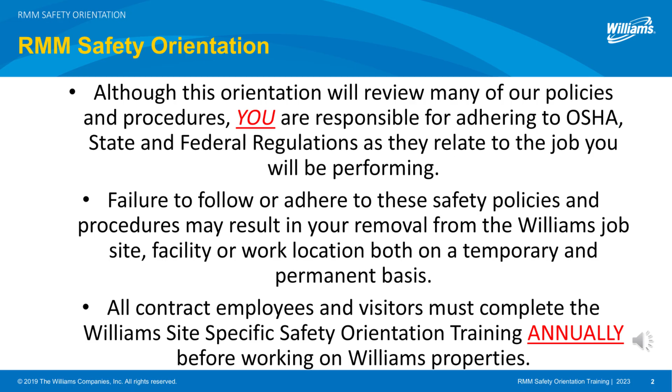All contract employees and visitors must complete this site-specific safety orientation training annually and pass the test before being allowed to work on the property. Upon successful completion, you will receive a completion sticker.

At Williams, one of our core values as an industry leader is to be safety-driven. We believe all accidents, injuries, and incidents are preventable. Williams authorizes all employees and contractors on site to stop work. Stop work authority means we expect all personnel to operate in a safe and controlled manner while operating within design and environmental limits.

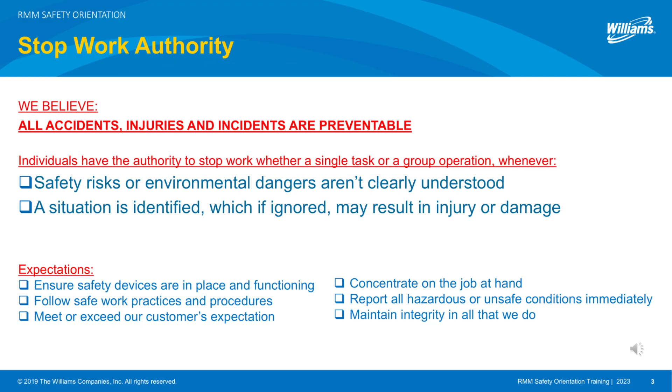Be aware that company facilities handle natural gas, methane. Explosive, flammable, combustible, or toxic environments may be present. Although this orientation is not comprehensive, it highlights some of the minimum safety requirements that apply to contractors and visitors. The safety orientation is not to be used by itself. It is to be used in conjunction with the Williams Contractor Safety Handbook.

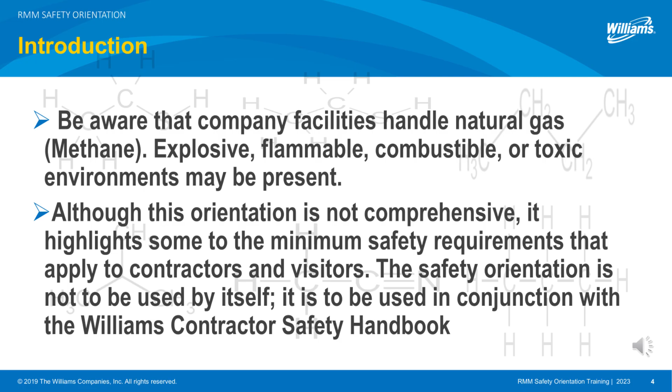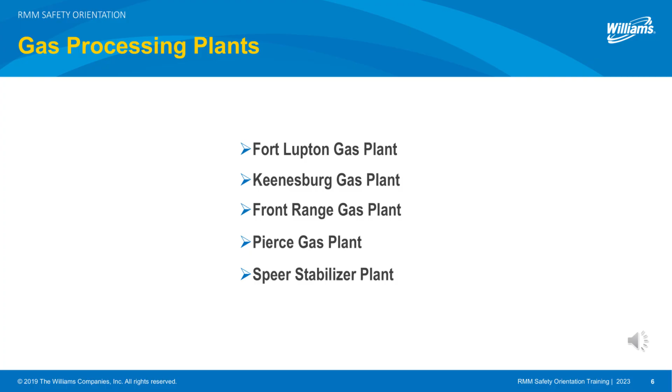Facilities and assets covered in this safety orientation for Rocky Mountain Midstream includes a gas gathering system which includes 11 active compressor stations and numerous pig launchers and receivers. Additional Williams Rocky Mountain Midstream facilities and assets covered in this safety orientation are 4 gas processing plants and an oil gathering system that has LACT units.

The following facility layout includes the safe driving path and emergency muster area for the Mustang compressor station. Please consult with your Williams representative regarding the safe driving path and muster areas for the compressor station you will be working at. The primary muster area is generally at the main entrance, and the perimeter 35 feet away from process and piping is the safe driving path. All contractor-operated vehicles shall follow these driving paths and sign in the control room.

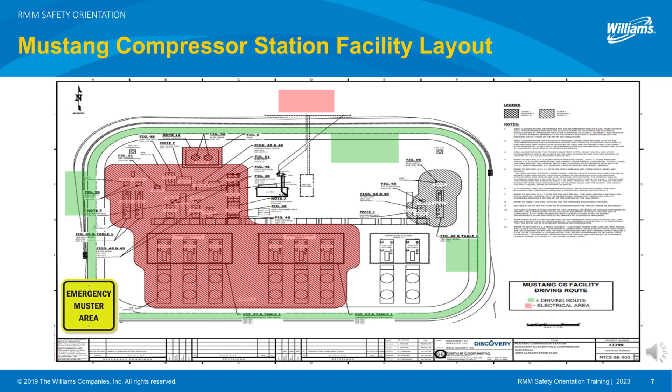This is the layout of the safe driving path for the Speer Stabilizer plant. The primary muster area is at the main gate. All drivers loading condensate will need to sign in at the control room, have a Williams representative issue a hot work permit, and properly ground bond their vehicle before loading activities begin. Williams considers the Speer Stabilizer plant to be a DOT facility.

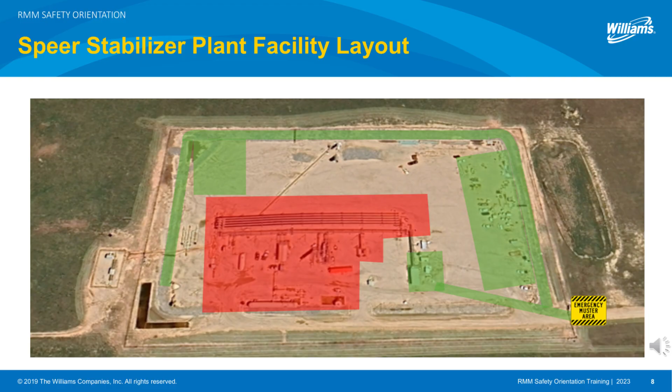The areas in green are the safe driving path for the Keenesburg gas plant. The primary muster point at the Keenesburg gas processing plant is at the control room. The secondary muster point is at the main gate.

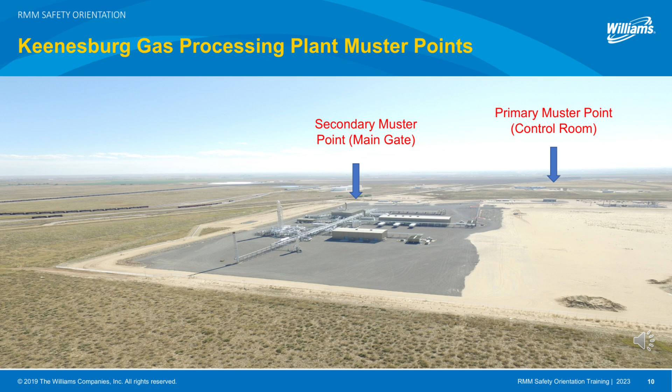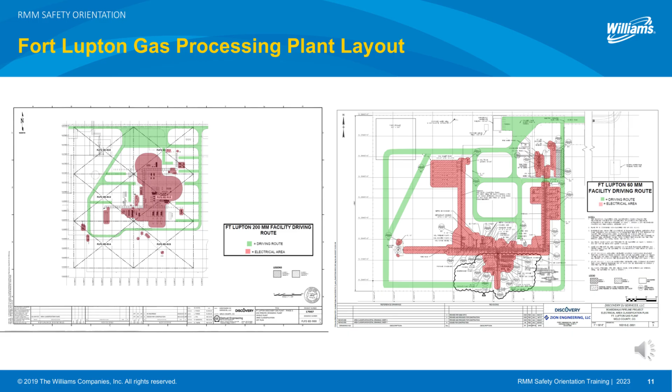The following areas in green are the safe driving path for the Williams Fort Lupton gas processing plant. Fort Lupton gas plant has a 60 million plant to the west and a 200 million plant to the east. The primary muster point at Fort Lupton gas processing plant is at the main gate. The secondary muster point is at the control room.

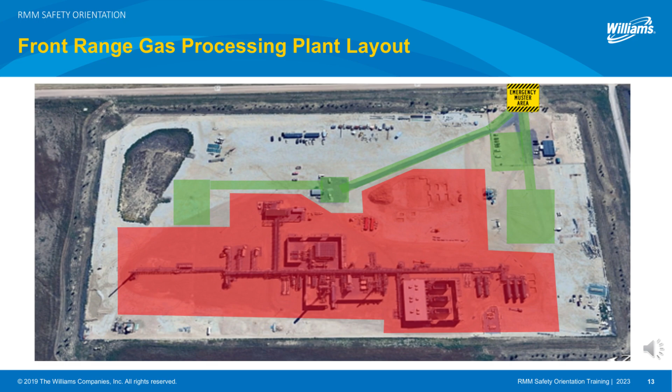This is the layout of the Front Range gas plant. The roadways travel through the plant and around the perimeter of the plant. Please remember to keep vehicles at least 35 feet away from process.

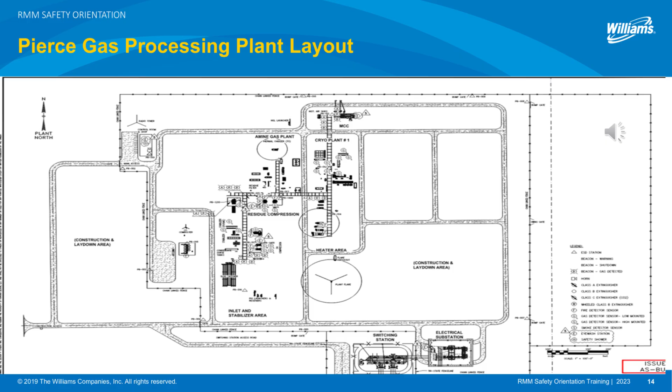The primary muster point for the Pierce gas processing plant is at the main gate. The secondary muster point is located directly west of the main gate by the curve in the road.

There is generally not a consistent design or layout for producer's pads, facilities, and pigging sites. The muster point is typically at the entrance of the location. Please consult with a Williams representative as to where the primary muster point is located.

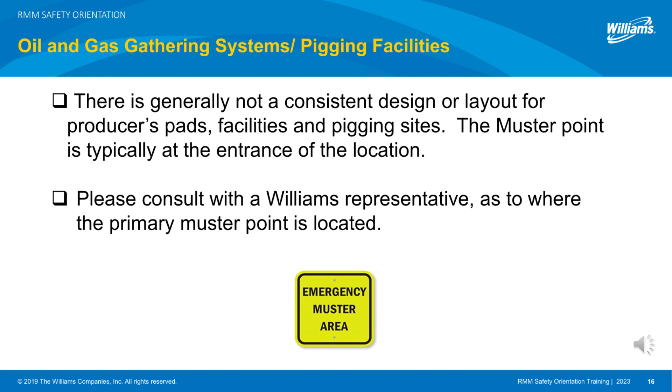Rocky Mountain Midstream has an emergency alarm system that consists of some visual alarms, audible alarms, or both. The alarm is activated in the event of an emergency in the immediate area or site location, severe weather, or other facility emergencies that require evacuation. Please consult with a Williams representative to determine what type of alarm system is at the area you will be working at. If you hear or see these alarms, stop work and evacuate the facility upwind, uphill, and upgrade.

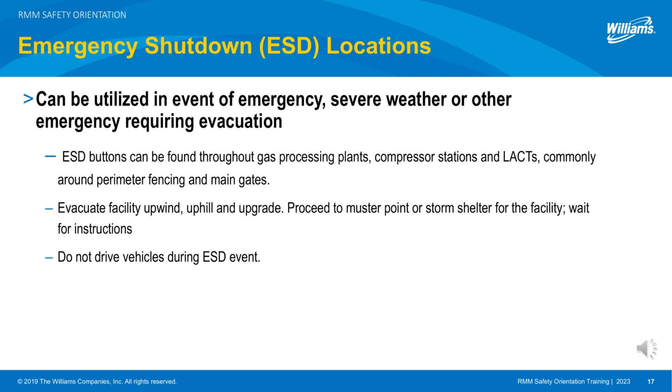It's important to always pay attention to the wind direction. Proceed to a muster point identified at each facility and wait for further instructions. Smoking, e-cigarettes, and vape pens are prohibited at Williams facilities except in designated areas. Ask a Williams representative where the designated smoking area is located, if needed.

By working at a Williams facility, vehicles may be searched for contraband. All accidents, incidents, use of stop work, and near misses must be reported to a Williams representative as soon as possible. The use of cell phones, cameras, and other non-intrinsically safe devices is prohibited at Williams facilities within 35 feet of process equipment, unless a hot work permit is in place.

Contractors must adhere and follow all posted warning signs and vehicle traffic patterns. Speed limits are 15 miles per hour.

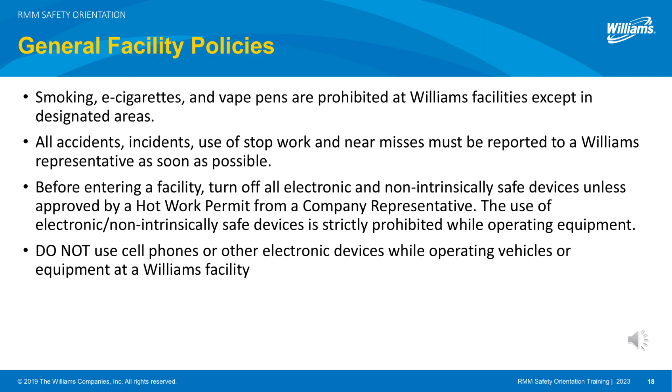All contractors and visitors must check in at the control room and with a Williams representative prior to starting work. All contract employees and visitors must sign in and out of the facility for accountability purposes.

It is the contractor's responsibility to ensure that all contractors have a clear understanding of this safety orientation, as well as have the ability to communicate effectively with Williams operations at all times.

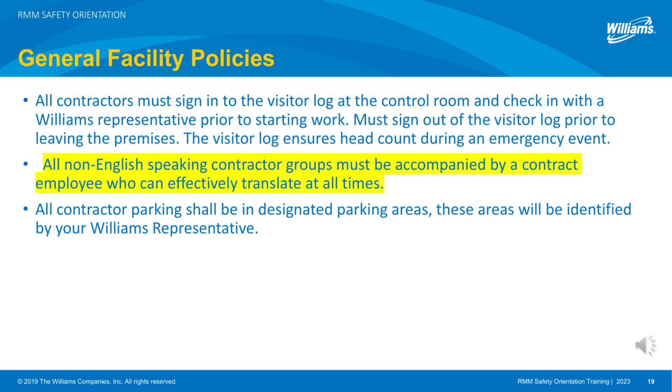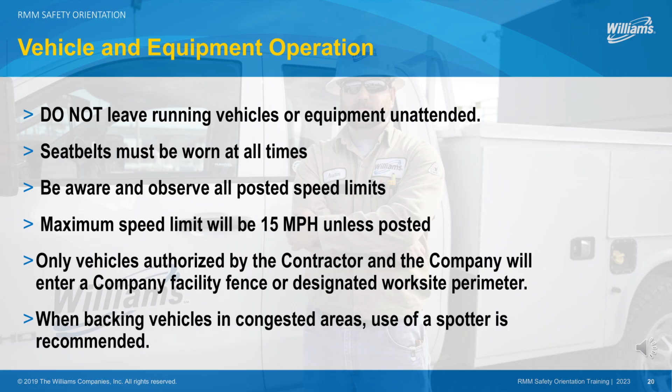All contractor-operated vehicles shall be parked in designated areas. Here are some rules about vehicle operation: seatbelts must be worn at all times, never leave running vehicles or equipment unattended, and be aware and observe all posted speed limits. Maximum speed limit will be 15 miles per hour unless posted.

Contractors must not operate any Williams equipment without direction or direct supervision by Williams personnel. It's critical that you remain aware of your surroundings when operating any vehicle or equipment. Conduct a walk-around check for hazards before movement. When conditions warrant, use a spotter and make sure that any equipment and items loaded on them are properly secured.

Remove any damaged or defective equipment from service immediately. Inspect all equipment brought to the facility prior to use. Use ladders with non-conductive side rails and visually inspect all ladders prior to and after use. All ladders must meet OSHA 1910.23 E requirements.

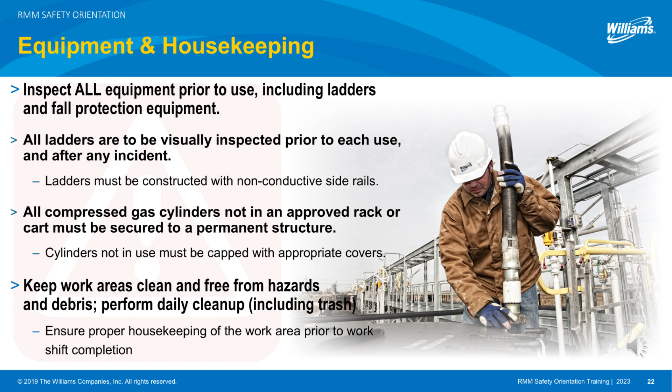Keep work areas clean and free from hazards and debris by performing a daily cleanup of all work areas, including trash. Williams' lightning policy requires contractors to stop work and cab up if lightning is 10 miles or closer.

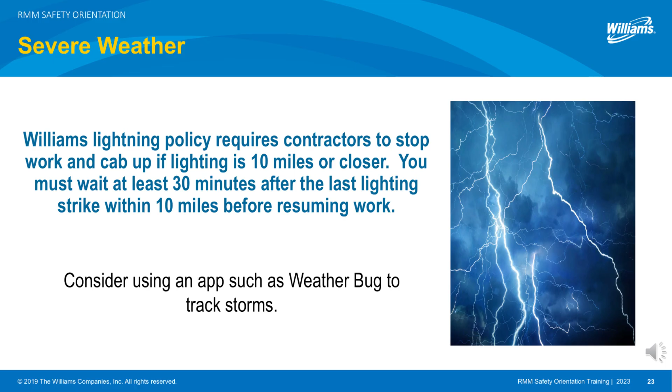You must wait at least 30 minutes after the last lightning strike within 10 miles to resume work. Consider using an app such as WeatherBug to track storms.

Smoking within Williams property is strictly prohibited. Do not bring lighters, matches, and e-cigarettes to any of our facilities. To find out where the smoking locations are, ask your Williams representative.

Firearms, drugs, and alcohol are strictly prohibited at Williams facilities. Vehicles may be searched at any time without warning while on Williams locations.

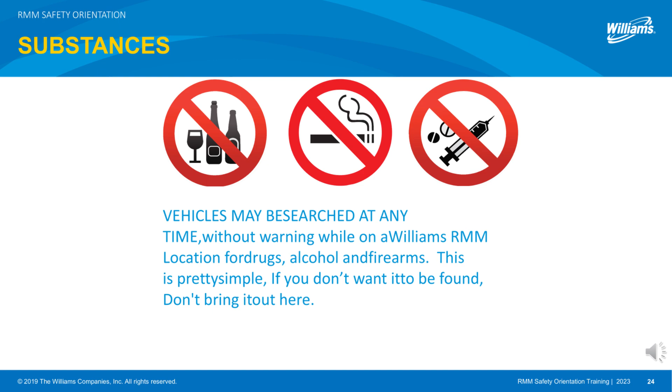Contractors and employees exposed to work-related fall hazards must use guardrails, control lines, or a personal fall arrest system. When working at heights 4 feet above grade or more, use a fall protection system or harness. Always use the appropriate tie-off anchor point.

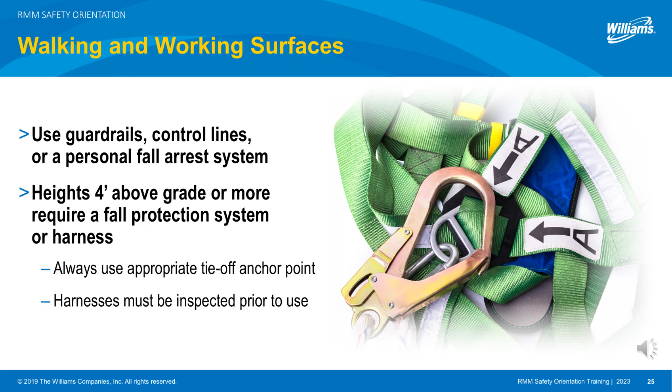Harnesses must be inspected prior to use. When working off a ladder, consider using fall protection and proper anchor point.

Contractors must provide their employees with the required safety equipment as identified in the Williams PPE policies and procedures. At a minimum, this includes flame-resistant, FR, long-sleeve shirt that covers all exposed skin, full-length FR pants, hard hats, safety glasses, safety-toed boots, personal 4-gas monitor, gloves appropriate for task, high-visibility FR vests while working around heavy equipment, and hearing protection as identified by signs in the facilities.

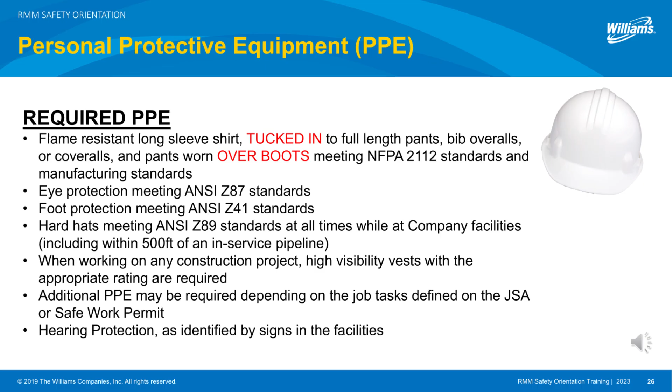If you have any specific questions regarding PPE at your worksite, contact your Williams representative.

All accidents, injuries, near misses, spills, or releases must be immediately reported to the facility supervisor, lead operator, project manager, or COM, and to the safety representative.

Do not bring chemicals to a Williams facility without prior approval from a Williams representative. Contractors bringing chemicals on site will be asked to provide a safety data sheet.

When operating a crane or other heavy equipment, remain at the controls while the load is suspended. Use 3 points of contact when entering or exiting equipment. Make sure loads are tethered and secured. Never walk under a suspended load.

All operators will remove their high-visibility vests during equipment operation to avoid unwanted mechanical movement.

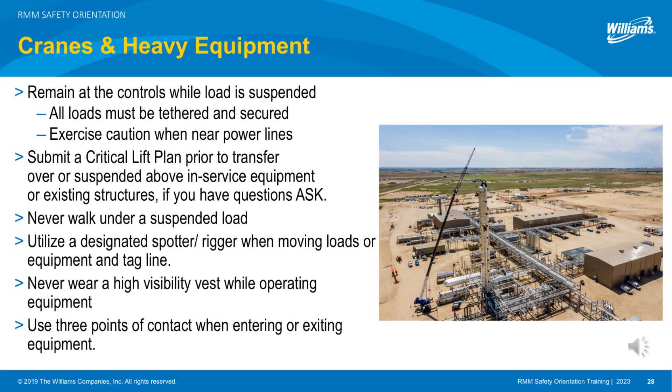Many of our locations have buried and overhead power lines. Exercise extreme caution when moving loads. When power lines are crossed or passed underneath, it requires a designated spotter or another control method, such as a gate or chain. Contractors must submit a critical lift plan prior to any load being transferred over or suspended above in-service equipment or existing structures.

Identifying hazards for each job conducted at Williams is a top priority. We do this by reviewing documentation such as JSAs, work plans, and work permits, which are covered during tailgate meetings with all personnel involved. Here are some of the potential hazards present in our facilities.

In addition to flammables and combustibles, they include but are not limited to frostbite due to cold products, asphyxiation, cave-ins, loud noise, leaks, benzene, release of energy, for example mechanical, electrical, product pressure, and naturally occurring radioactive material, uneven or obstructed walking surfaces, and environmental conditions.

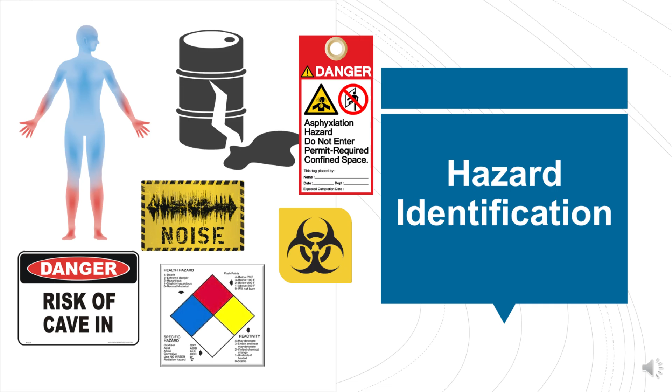The Williams Life Critical Operating Requirements are our most important standards. They cover the most critical safety hazards that have caused significant injury or loss of life within our industry. At Williams, Life Criticals require 100% compliance every time.

The permit to work provides a clear line of communication between supervisors and personnel performing maintenance tasks. It helps eliminate incidents, service disruptions, process upsets, and abnormal activities that may occur when there's a lack of planning, coordination, or communication of maintenance activities, and addresses simultaneous operations. It ensures that work groups understand the nature of the work being performed, the restrictions and conditions under which they'll be working, as well as the approvals and acknowledgments required.

The permit to work is also used to document pre-job tailgate meetings, which are conducted daily to emphasize safety and hazards associated with job assignments, job plans, or tasks.

All contractors performing work on company property, including greenfield areas, are required to complete their own JSA for their specific work or tasks. Identifying all hazards before a task is started is an important part of every job. If the contractor does not have a JSA form, they can use the Williams Contractor JSA form.

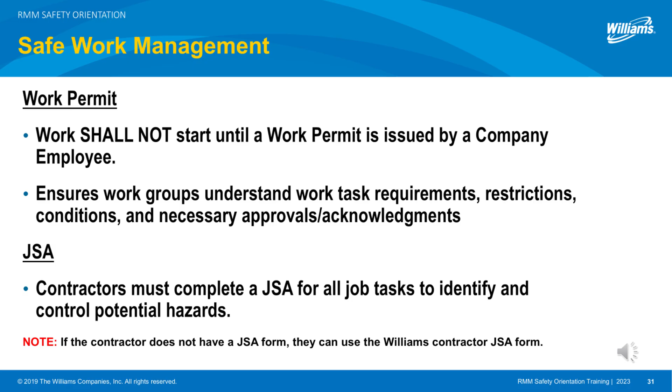Let's talk about performing hot work at Williams. Hot work is any work that may generate static electricity, such as sandblasting, vacuum operations, welding, cutting, grinding, abrasive blasting, drilling, and so on. Before performing hot work at a Williams facility, there must be a calibrated and bump-tested four-gas monitor present. The individual operating the monitor must be trained and qualified.

Initial monitoring of the process area where hot work is to be performed must be recorded by a Williams representative. This is required before the work can begin. Reading of the hot work area must be at 0% LEL. Include the name, date, and time of test on the hot work permit. All four gas monitors need to follow company or manufacturer calibration and bump test recommendations.

Because vehicles are an ignition source, when conducting vehicle entry at any Williams facility, perform initial monitoring of the process area prior to entry. A hot work permit is required for hot work being performed outside of a classified area. A fire watch must be provided by the contractor for the duration of a spark-producing hot work project, and for 30 minutes after the last hot work activity is completed.

This individual must be trained as a fire watch and cannot be assigned any other duties. If they need relief, they must find someone to cover their job. When a fire watch is needed, at a minimum, a 20 pound dry chemical fire extinguisher must be present. Contractors providing a fire watch must provide their own extinguisher and training documents for hot work.

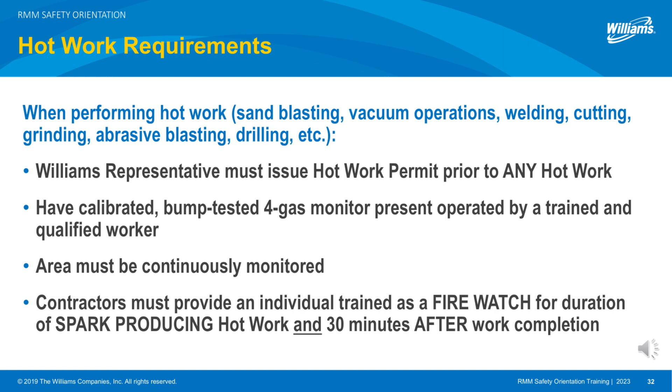Lockout tagout is performed when servicing or maintaining equipment if the unexpected startup or release of stored energy could cause injury to personnel. This process is used to isolate and de-energize equipment and circuits. All Williams and contractor employees involved in lockout tagout must provide their own locking devices for their portion of the lockout tagout system. These devices must be able to withstand the environment they will be exposed to.

All Williams and contractor employees must walk down the lockout tagout plan prior to beginning work. Contractors must remove their lock from the lockbox prior to working on another project or leaving the site.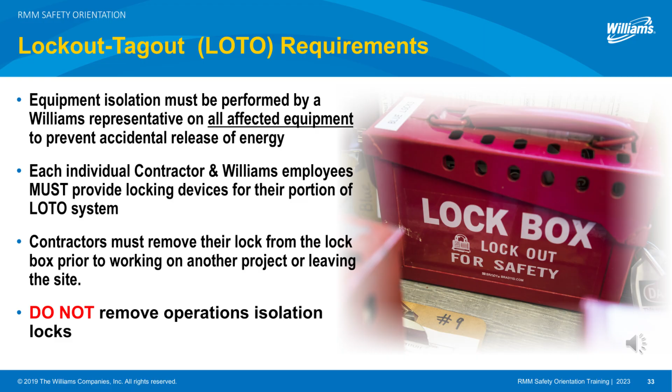Now let's review some key things to remember about entering confined spaces. Confined spaces are any openings that are large enough to bodily enter, are not designed for continuous human occupancy, and have limited means of entry and exit. Do not enter a confined space without a confined space permit issued. All permit-required entry will be completed by a qualified contractor or Williams employee with rescue personnel on site or available.

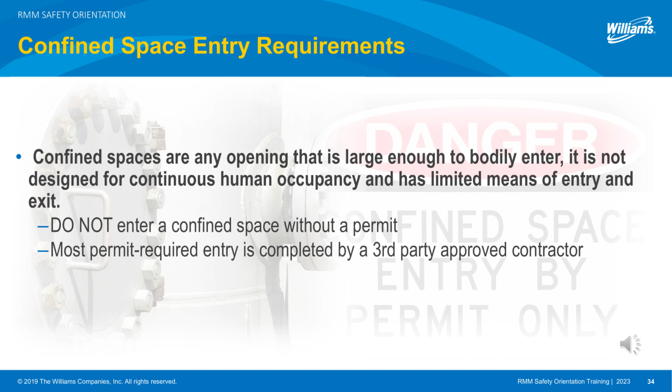When performing excavation and/or trenching work at a facility, use the State One Call system and verify that existing utilities are located prior to excavating. The on-site competent person should ensure that all reasonable efforts are made to prevent any known or reasonably predictable hazards are identified. During any excavation entry, the competent person will reevaluate if conditions change.

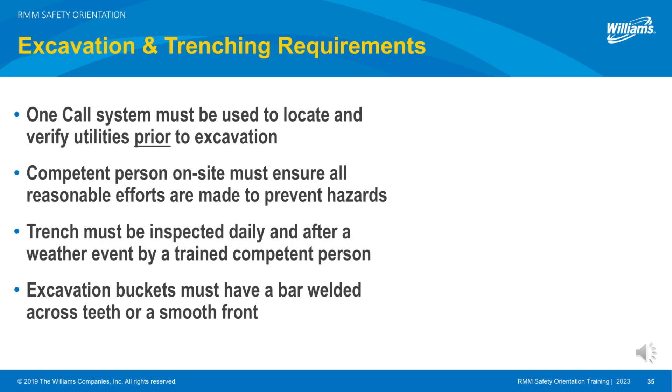Inspections should focus on preventing any situations that could result in a cave-in, failure of protective systems, hazardous atmosphere, or other hazardous conditions. Excavation buckets must have a bar welded across the teeth or have a smooth front. A Williams representative must be present during mechanical excavations.

Finally, let's review some electrical safety requirements that you should keep top of mind. Electrical equipment, cords, lighting, welding leads, etc. must be in good condition with no exposed wires or damaged insulation. Only electrically qualified persons are allowed to work on exposed, energized electrical parts or conductors 50 volts or greater.

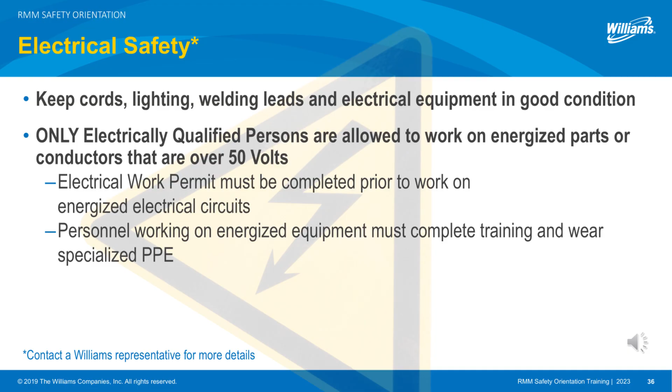An energized permit to work must be completed prior to such work. Any individuals working on energized electrical equipment must complete additional training and wear specific PPE. Exercise your stop work authority, plan your work, and ask questions when you are not sure. Watch out for each other, report all incidents, including any near misses. Do not take shortcuts. You are responsible for your own actions.

This concludes our safety orientation training. If you have any questions, please contact a Williams employee.